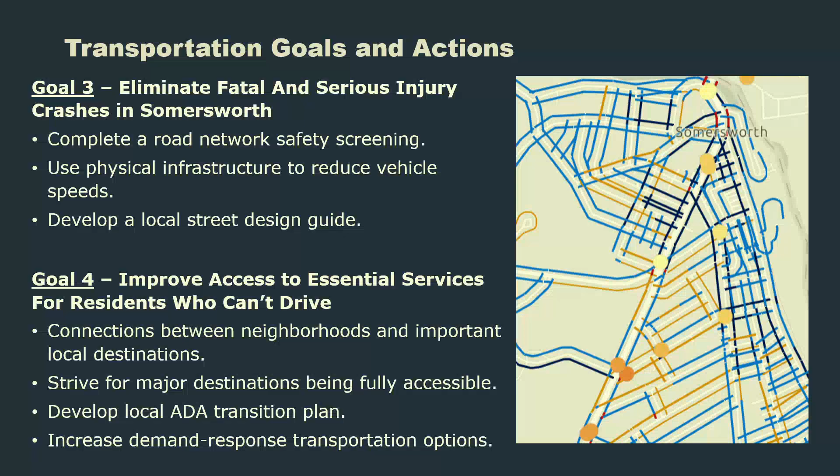That demand for those services just continues to increase, and Somersworth is quite well situated in terms of the overlap of different services that are out there - there are at least 5 or 6 agencies that provide that type of transportation.

Last one, speaking to that kind of identity and enhancing areas that have been underdeveloped - taking what was successful in the downtown as far as the streetscape and kind of replicating that throughout town.

So we've been looking throughout the region in terms of ways to lift all boats - as you develop, as commercial development comes in or residential, how can the transportation systems be improved in conjunction rather than playing catch up later when you already all of a sudden have increased vehicle traffic and pedestrian traffic, but no facilities for those types of uses.

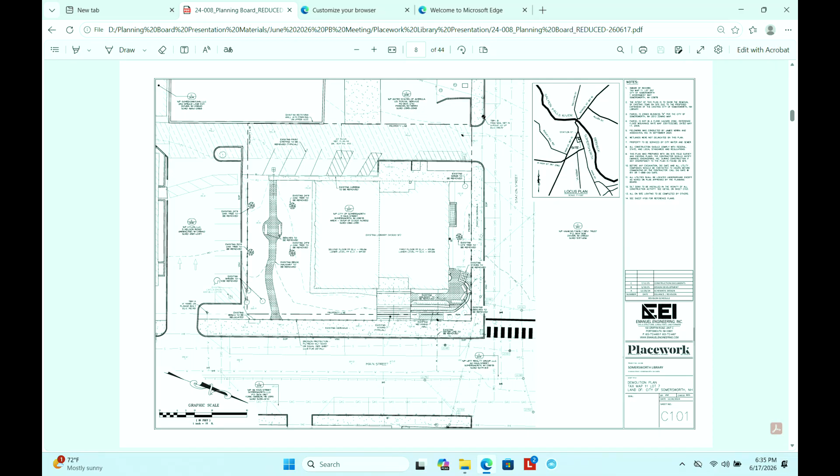So this is the existing building. The project proposes an addition to the left side of the image that you see here, the open space just to the left of the existing library. Existing conditions plan. So again, this sort of open space that you can see here on the left side of the footprint.

A couple things to say about the existing site. I think most are familiar with the alley running between the library and the post office. That alley is actually a right-of-way that was created around the time of the urban renewal efforts here in town. And so it exists to allow free access, even though it's on the city property, through the site from one end to the other.

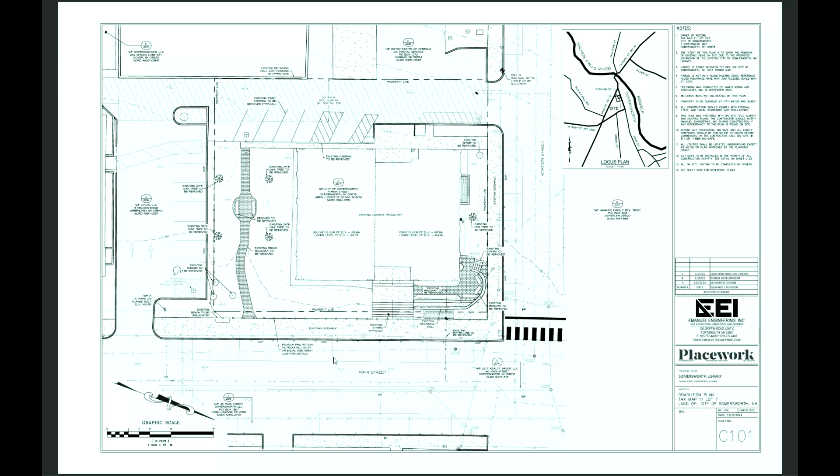And then, of course, the trees. There are 4 mature trees on this site. We would need to remove those as part of the project. They are overhanging the existing building. It's a maintenance concern, and so that's another element of the site design which we're seeking to reconstitute, and I'll talk about that in a moment. And then existing utilities, we don't need to get into too much detail, but the project will be reconnecting the building to most of the existing city utility networks in the vicinity.

The existing monumental stairs along Main Street would remain more or less as they are, and then there would be the creation of a new accessible entrance just about at sidewalk level to access the library addition, with an outdoor terrace area that fronts onto Main Street that you'll see in a moment. Part of the concept with this outdoor terrace is to potentially allow off-hours access into a shared meeting area inside, just inside this door. And so that is another element of the design.

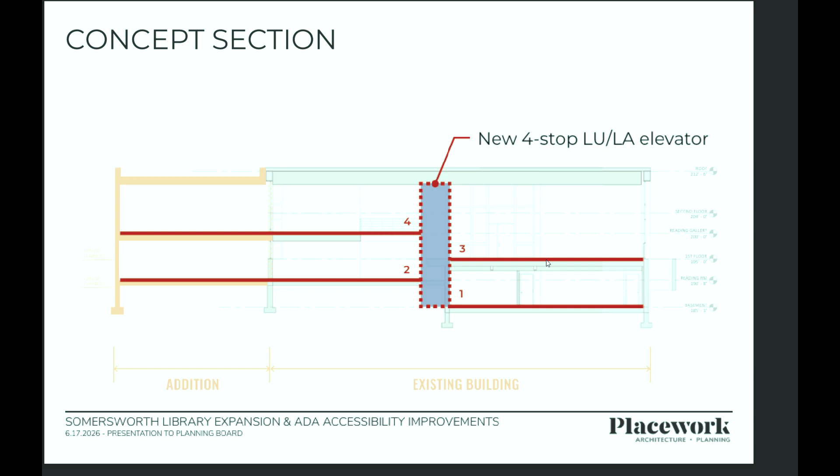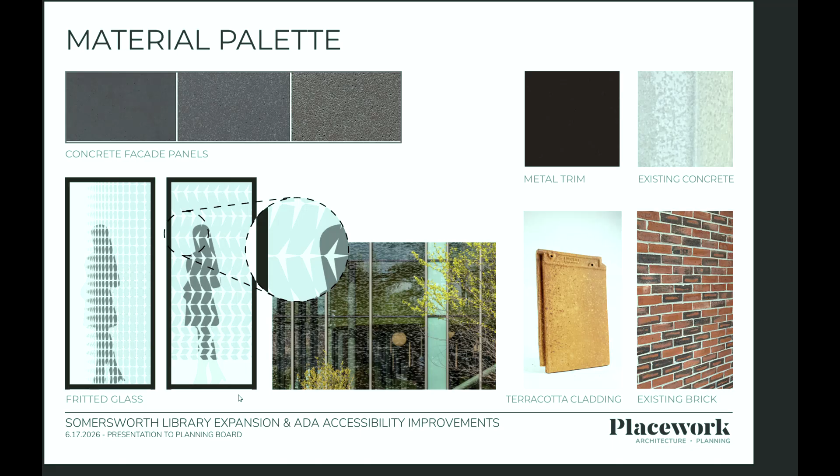So these are some early mock-up studies that we did on the material palette. We are using complementary materials to the existing building, so concrete facade panels, terracotta cladding which complements the existing brick, metal trim, and glass. It's a pretty simple material palette that we've proposed here.

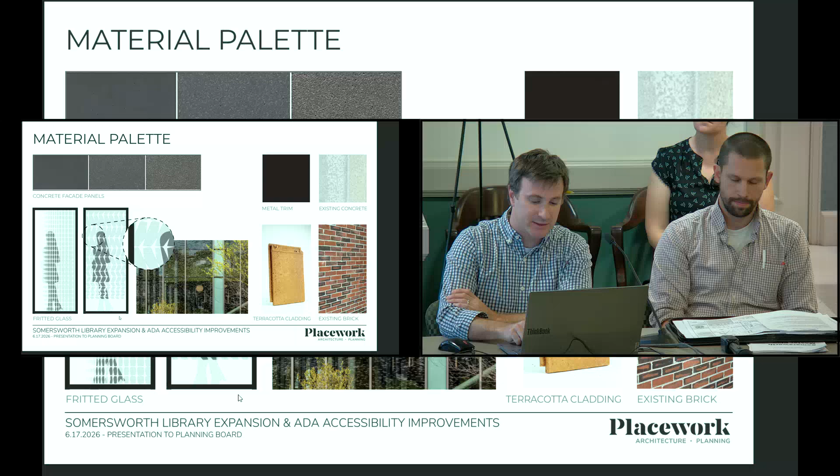So this is the proposed civil site plan. I'm going to turn it over to JJ, who's going to talk a little bit about some of the technical aspects of the design, and then we can take any questions the board has.

As Josh said, I'm JJ McBride from Emanuel Engineering. We're the civil engineers for this project. Josh touched on some of the site work already, so I'll mainly be talking about the drainage. Before I get into that, I wanted to talk about the parking a little bit.

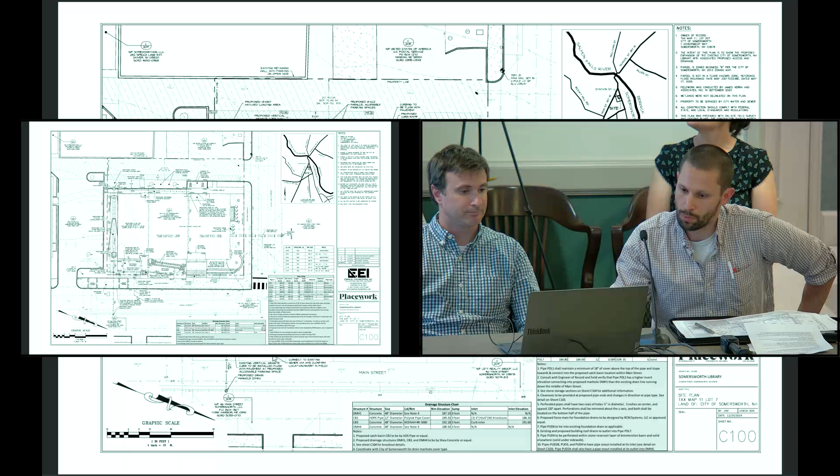Josh spoke about the ADA parking spots in back, and we're also adding one in the front here. He talked about the access in the front of the building. For access, we'll need to make that curbing flush with the road to improve access into the front of the building.

Utilities: Josh spoke a little about the gas, which is to remain as it is. We're proposing new domestic and fire water into the side of the building. The gas is right here too, and the water would be connecting right in here. The electrical service comes in here, which would be replaced in kind. We've got a proposed new sewer line, right in this area, which would connect into the public sewer as well for the new building.

And then I'll talk more about the drainage, but we've got our overflow drainage pipe connecting into the stormwater in the middle of Main Street.

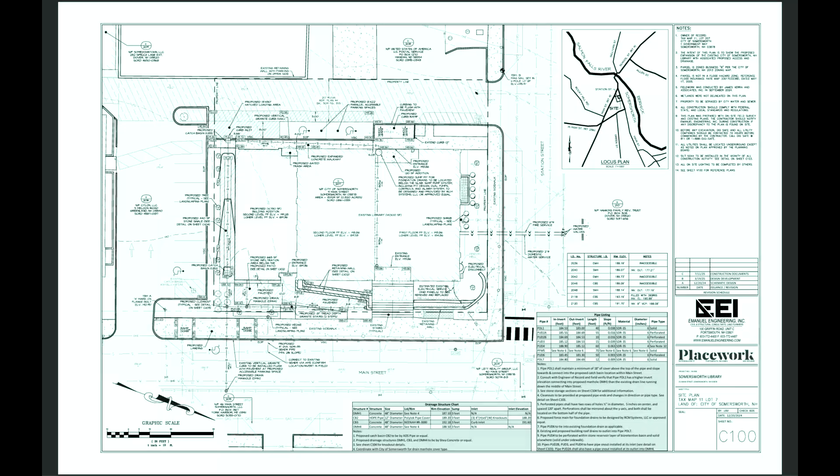Currently there's a patio and walk area in this area. That's to be removed, and we're proposing plantings in that area. This larger patio area would obviously replace that. I think that covers the site stuff, and I'll hand it back to Josh.

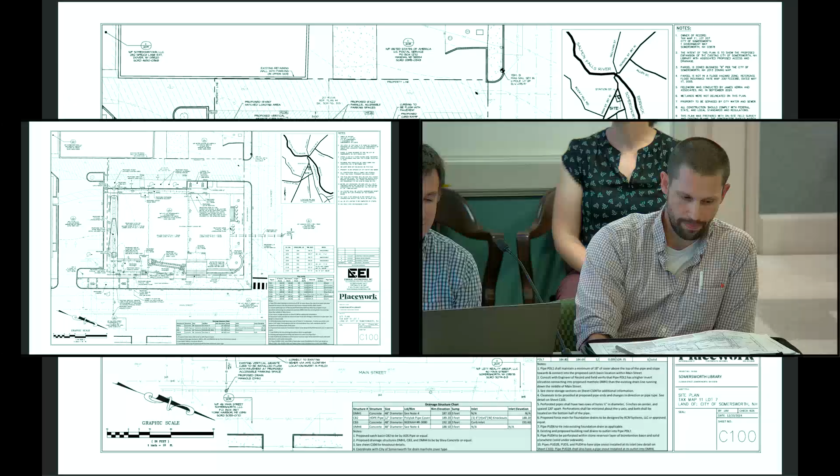We do have a professional landscape architect who's looked at this. I don't have that person here right now, but he developed with us a planting plan. We worked with the city to review the invasive and preferred species lists - I think DPW has developed a document, and these tree selections were developed in coordination with that.

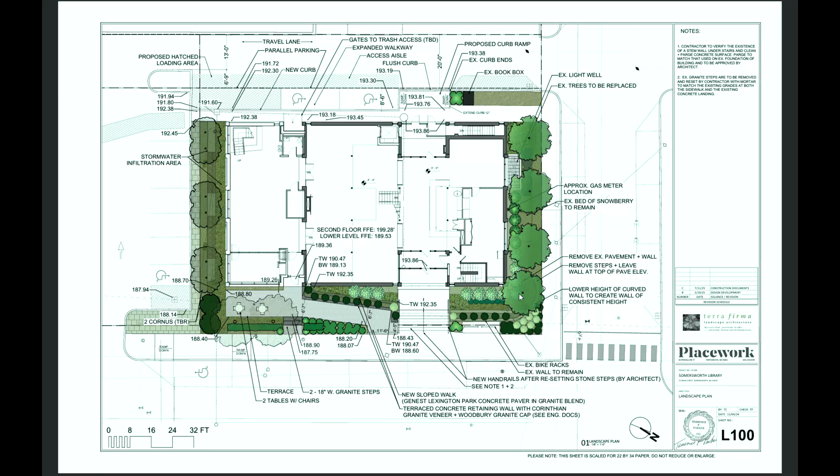As JJ mentioned, most of the landscape on the right side of the building and the Main and Station Street corner would be redeveloped and replanted. There's currently a walk or terrace on this side, which would be removed and planted with new plantings.

Thank you. Open the public hearing. Anybody care to comment on the new library? Any correspondence, Director Mears? None this evening, Mr. Chairman? Seeing none, close public hearing. Turn to questions from the board.

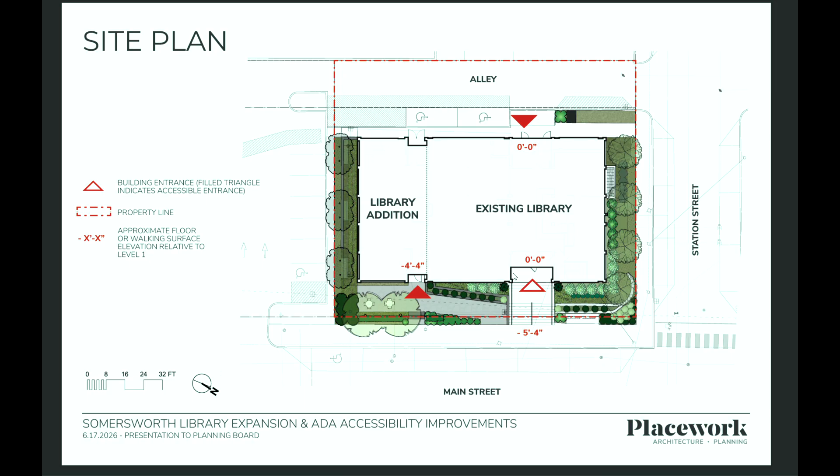Yeah, the difficulty is the amount of distance you'd need to go up to get to this is about over 5 feet. So that's a different level than the existing one, right? Can you show that on the section on that slide? Yeah, so the existing entry is at this 195 level. The street is somewhere slightly lower than this 190 foot 8. So we're really meeting the sidewalk grade closer to the 190 foot 8 elevation. That's the reason why.

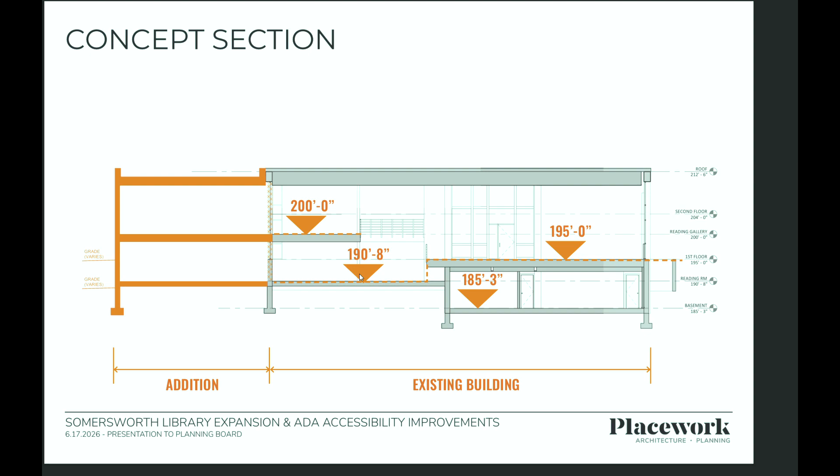You haven't developed the other plans for the other floors, like first or second floor, have you? You have it in this slide, right? We do have the interior plans for the building. It's fully developed, but we put together this package based on the planning board's interest in the site. I can show it, because I was trying to figure out how the elevator will work connecting those levels, and it was kind of questioned, you know what I mean?

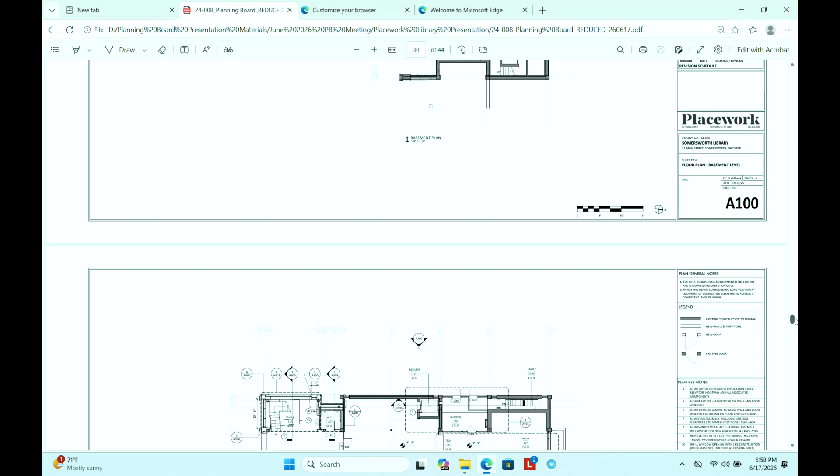It was kind of hard to figure that out in my mind because I was imagining the space. There's a full set of architectural plans that we haven't shown you today, but this is just the first floor plan for the building. It was just a concern on my end, seeing the elevator and the way you were proposing that new entrance.

So this is the proposed elevator inside the building. It's connecting those floors where they split, essentially. So the one in the middle is not an elevator that you're proposing?

If you go in the middle of the plan, there are some doors that open. So there's no elevator there? No, that's storage. The elevator is here.

Okay, thank you. The question is, you'll still be able to access the main floor from the back street entrance, right? Correct, that's not going to change. Mr. Wodazinski, I don't know if this is already part of this renovation, but...

...are there any community rooms that would be part of this, that would be set aside for community members to have private meetings?

The intention of the room that I'm circling here is just that. It's a multi-purpose meeting room. I think we've got it set up for 12 here, but it could be up to 15, 20, 25 people depending on the configuration of the seating.

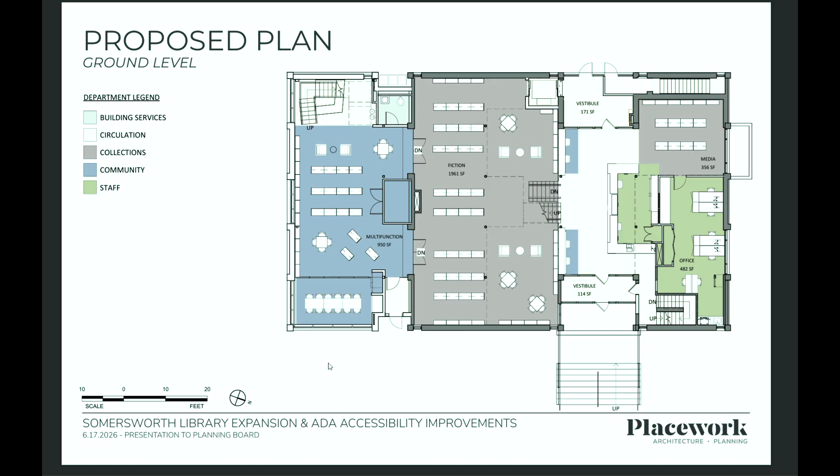Any other questions from the board? Any final comments by Director Mears? None this evening, Mr. Chairman. So no action needed at this time? No. All right, thank you very much. Thank you.

Item C, Civil Consultants New England is seeking site plan and conditional use permit approval for a 15,000 square foot industrial building with associated parking infrastructure on a property located at 24 Interstate Drive in the Industrial I District, assessors map 58, lot 6H, site number 02-2026, and CUP number 01-2026.

Director Mears, anything to add? Yes, thank you, Mr. Chairman. The applicant is proposing to construct a 15,000 square foot single-story building for industrial use with office area, with 28,000 square feet of new pavement with associated utilities and parking facilities.

The applicant is seeking to continue the public hearing and application to the July 15th Planning Board meeting to address staff comments on the proposed development before it comes before us. So we're just looking for a motion to continue this application to the July 15th Planning Board meeting.

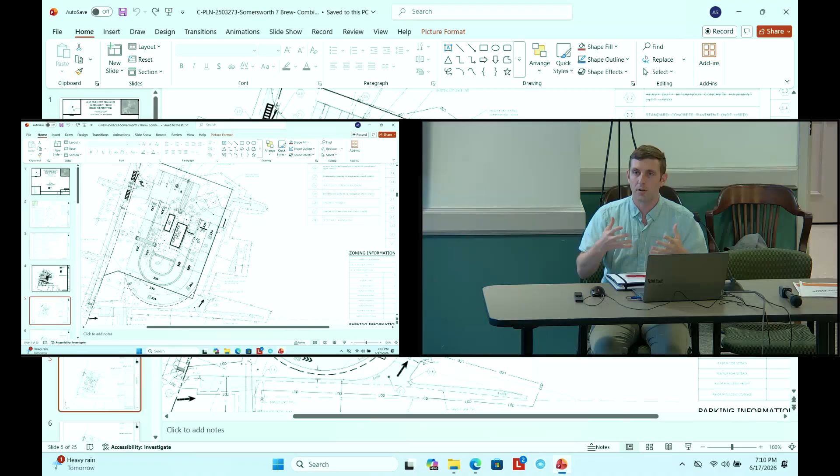They do have a canopy that extends from the coffee shop. It extends out plan right, completely over the inner queue lane, and extends about 4 feet over the outer queue lane, just enough to cover the driver's side window. So as the brewistas bring orders out in inclement weather, they're under cover and not getting rained or snowed on.

As you come around the back, there is a pass-through or bypass lane for anybody who wants to exit the queue, perhaps because they forgot their wallet or the line is longer than anticipated and they'd like to leave. They have that ability coming around the back.

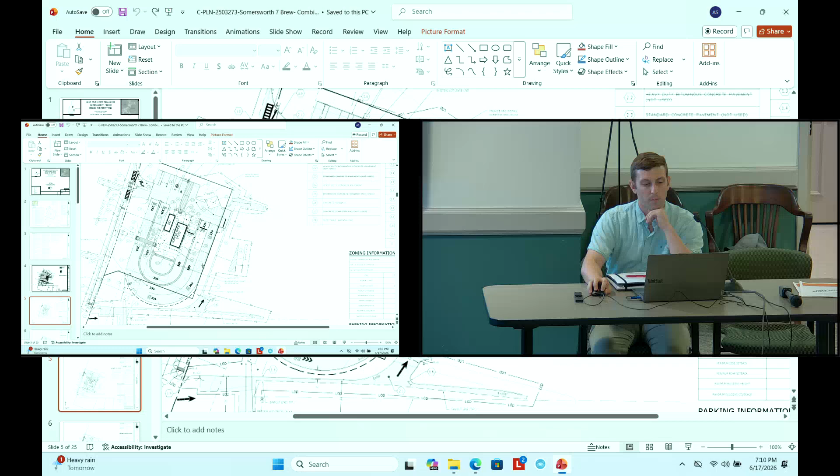We located the refuse container, the dumpster, up on the top right corner, trying to tuck it away from the queue lane so that trash pickup doesn't impact operations or back up traffic into the street. It's angled so it can be picked up from the shopping plaza side, minimizing impact from a traffic standpoint to the public way.

We have 6 employee parking spaces located here on the far north end by the Dairy Queen. As I mentioned, there's no indoor seating, so it's really just employee parking here. They max out at 5 to 6 employees per shift, so 6 parking spaces is about what they need. We also show the required EV space, the one ADA compliant space, and a striped crosswalk heading towards the building.

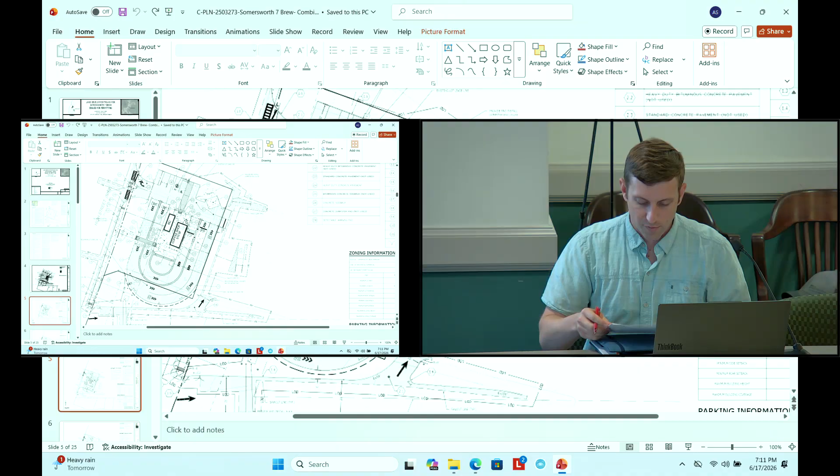The setbacks are all in compliance with regulations. From a building standpoint, the closest is the High Street side, where we have about 7-8 feet to spare in excess of the required setback. Parking is similar; the closest is also the High Street side, where we more or less match that setback, which is actually an improvement on existing conditions, since the paving on that side currently goes pretty much right up to the street line.

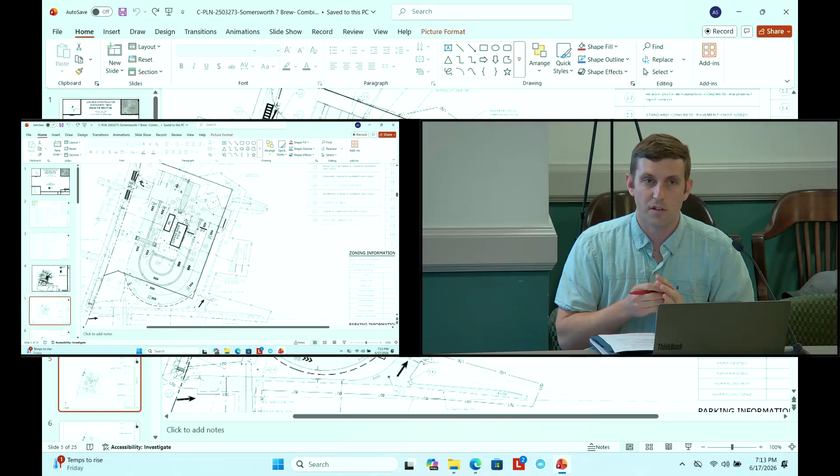Quickly, a couple other minor items. We are proposing full site lighting, so when the application comes we'll have a full site photometric plan with that. Seven Brew would like to request an LED ribbon light, similar to a neon light, around the canopy. I can show what that may look like and where it would go on the rendering in a moment. That's something I'd certainly like to solicit feedback on. I believe that would classify as a waiver we would need to request.

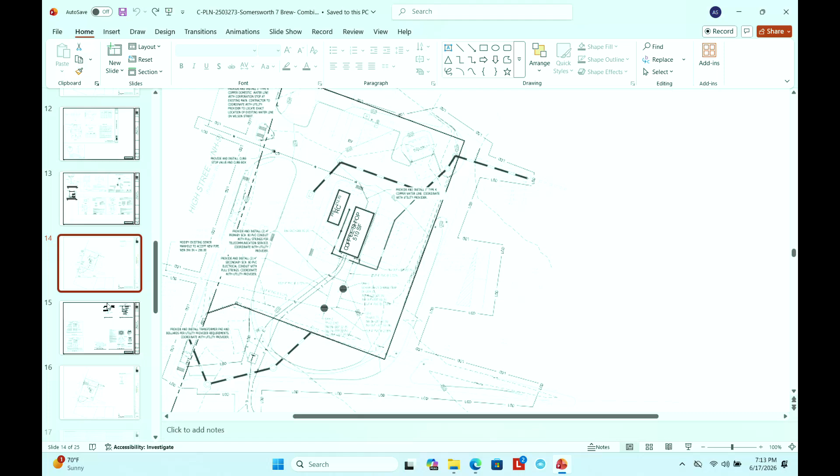And then landscaping, we've more or less gone through the full design at this point, but I can share a brief bit. We do have a full comprehensive landscape plan that includes all drought-tolerant plants. Seven Brew would like to request a waiver from the irrigation requirement because they've strategically selected drought-tolerant plants, so we'd like to understand if that's something you all would be open to.

As you can see, there's a fairly robust planting plan here with a number of shade trees. We have screening around the dumpster enclosure; Seven Brew typically likes a masonry enclosure around 3 sides so it completely blocks sight lines, with a solid gate on the front side. The plantings around the back help soften that appearance and further screen it, and we're adding shrubs along the street side between the parking, queue, and road to further break up the appearance and soften the development.

Just quickly, before I jump to the elevations or the rendering - generally Seven Brew facilities are open from about 5:30 in the morning until about 10 o'clock at night. Their hours vary slightly on the weekend; I don't remember those variations off the top of my head, but I can get that information for the formal application. Generally it's 5:30 a.m. to 10 p.m. They have a range of different beverage products that cater towards mornings, afternoons, and evenings.

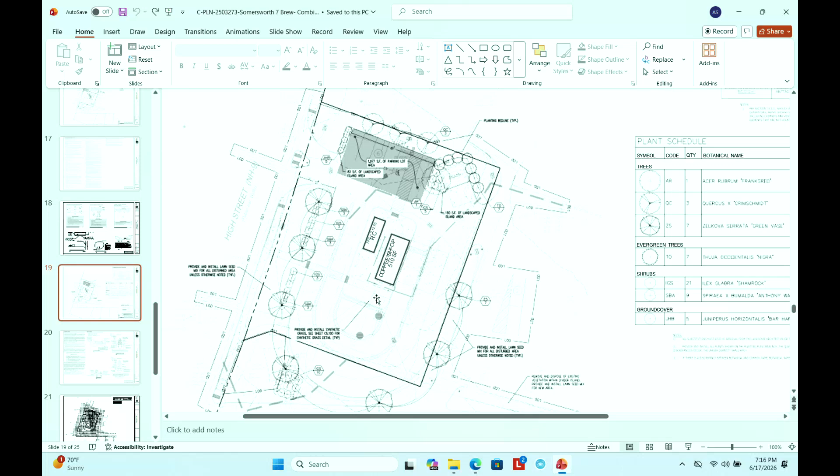We'll touch upon the architecture in a moment. The last item we wanted to potentially discuss from a waiver standpoint was the requirement for a loading or delivery stall. We did look throughout the area, and pretty much all of these quick serve restaurants, we did not see any with a loading stall. Certainly, feel free to correct me if I may have missed one or two.

Operationally, Seven Brew schedules their deliveries off-peak, and in many cases, where available, they have the delivery vehicle park in the bypass lane during those off-peak hours. In this location, that would probably be here on the right side, at the beginning of the pass-through lane where it straightens out, so the truck is out of the queue lane and doesn't block normal operations. They're also fairly closely located to the back of the coffee shop building, where the dry goods and products will all enter the building.

So I think with that, I can jump to the rendering. This is their prototypical rendering, not site specific yet, that's being worked on. But as you can see from this image, their proposed finishes consist generally of more masonry appearance. It is Nichiha panels, so it's more of a prefab concrete panel, but imprinted and colored to look like brick above, more of a stone pattern brick above, and more traditional brick below.

It is roughly 1.5 stories in height. Generally, the peak of the roof line is about 20 feet. The second floor is not an occupied space, so that's why we say it's 1.5 floors. On some locations, they do have access up there for dry goods long-term storage, but it's not a space they frequent.

And then you can see here the canopy in this kind of blue-green color coming across. That is where they typically propose the LED strip lighting along the canopy, and many times they like to put it under the roof line as well to help accent the signage on that main elevated element of the building.

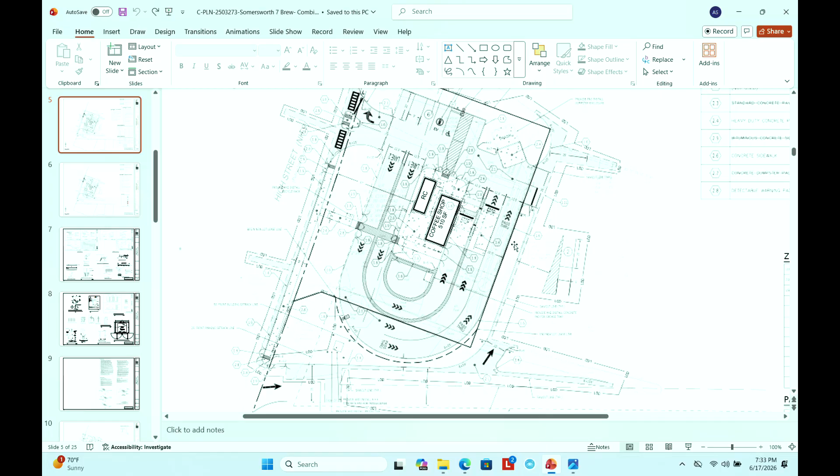If I may on that last piece, I think I'm following, but I want to make sure. Right now it's hard to see because we have the existing conditions in light gray. But in the outer, the pass-through lane here, right at the very edge of that lease line, there is space for a landscaped island separating the queue and bypass from the shopping plaza. So if the project were approved, we would have the queue, the 7 Brew pad site, all of that. Then there's about an 8-foot landscaped island separating the 7 Brew side from the plaza, then a drive aisle in the plaza, and then parking on the other side.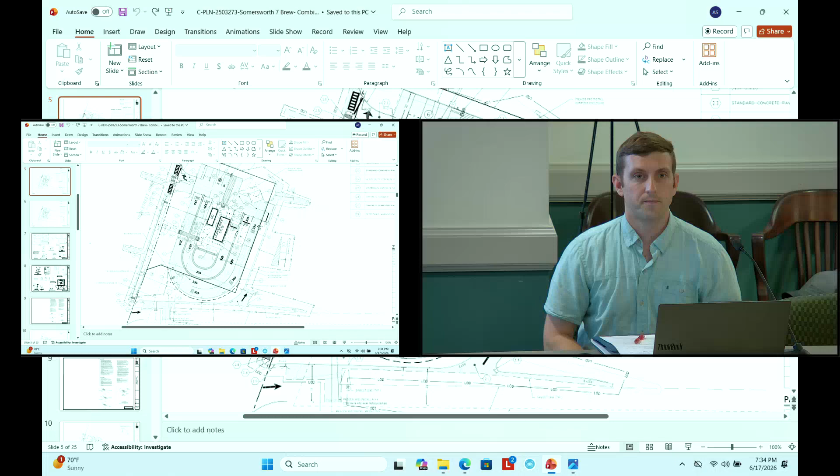So I believe that would satisfy your comment, as long as that drive aisle was two-way and somehow distinctive from the parking stalls, whether that's with paint, curbing, or something. Yes, that's correct.

Perfect, on that same subject. I know there's an island that comes in off that road and goes in about 100 or 200 feet beyond the back of that parking lot. If they could cut into that existing road—

Turn on your mic, please. Turn on your mic.

If they cut an island to make that existing road go right behind the building, instead of having to go out that 100 or 200 feet beyond the parking lot as you enter that side road, I think that would eliminate a lot of the traffic getting into the parking lot to get to that south entrance.

Yes, we do actually have that. It's right at the very bottom right down here, I think where you're referring to. We are proposing to cut in a one-way aisle so that the traffic coming in below the cemetery can cut in. We don't want that section being two-way since that cemetery entrance is an entrance only, but we do have that cut through. Yeah, I'm familiar with it, I plow that parking lot all winter, so I know that if they took that island out, it would be a blessing.

But no, I mean, it would eliminate a lot of traffic going into the parking lot if they could actually do that entrance. Very good. Thank you.

I showed this picture to my wife, who has nothing to do with planning or whatever else, and I asked what she thought of it. Her first reaction was for the safety of the people going out to deliver the product, especially in the outside lane, since they're crossing a lane. I'm glad you said you plow that parking lot, but that was a nice little lead-in actually. It can get pretty slippery around here in the wintertime, and she was concerned about the safety of the employees crossing over that. For somebody whose first word out of their mouth when they see a picture is that, that's an issue.

I don't know how you deal with that. You probably don't have the same kind of snow conditions in the south throughout the winter that we have up here, with freezing rain and all of that. I don't know how you deal with that, but that is an issue of concern. I don't know if you have some kind of special footing that can be put down there, or heating under that walkway so it melts. I don't know what you do about it, but I'd be worried about those employees crossing that.